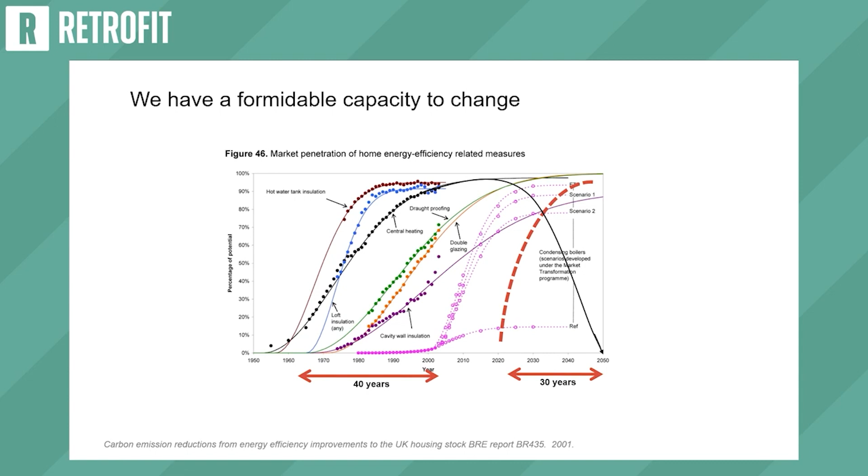So the UK context is 27 million dwellings: 18 million are owner-occupiers, 4.5 million are private renters, and 4.5 million are social rented. 60% of all homes are older than 80 years, so this is really UK specific. 21% of the stock is Victorian, which is the least efficient of the stock as well. And 86% still use gas fossil fuel.

This graph is extracted from the LETI retrofit guide, which illustrates per character, whether it's a flat, a mid-terrace, a semi-detached, detached, or bungalow, the energy efficiency of the dwellings of the UK. On average, at the moment, the performance is roughly 130 kilowatt hours per meter square. We need to reduce this down to 50. This is the great shift that we need to do. If you just want to keep an average figure, this is the sort of shift that we need to do as a country.

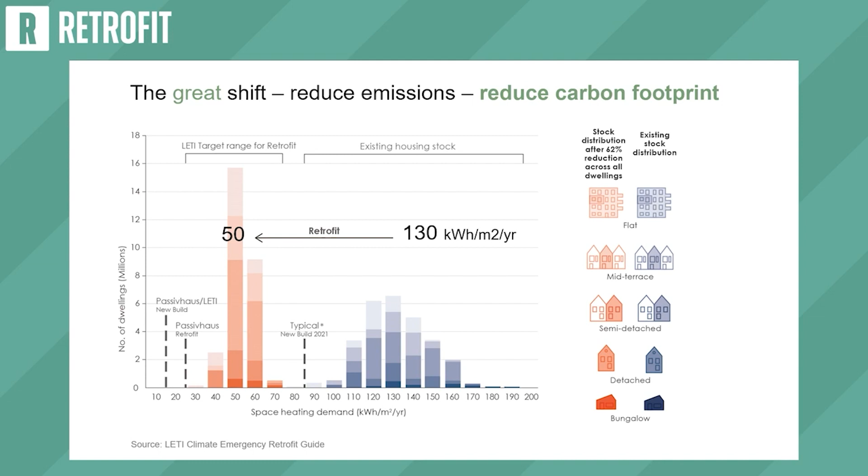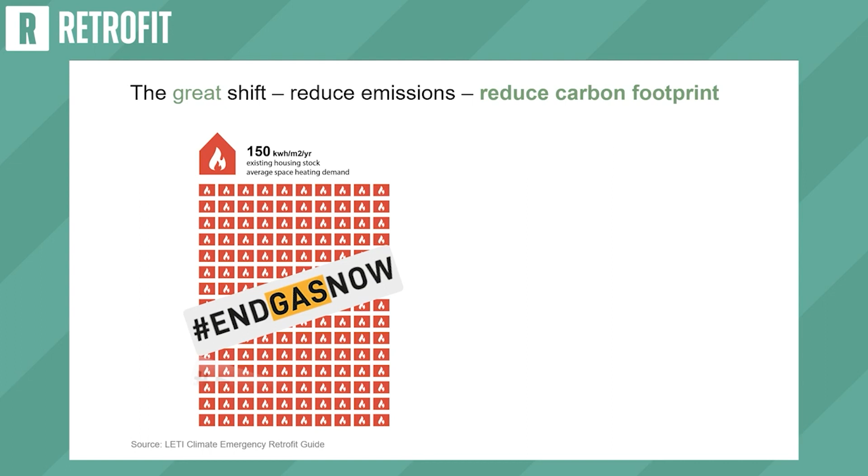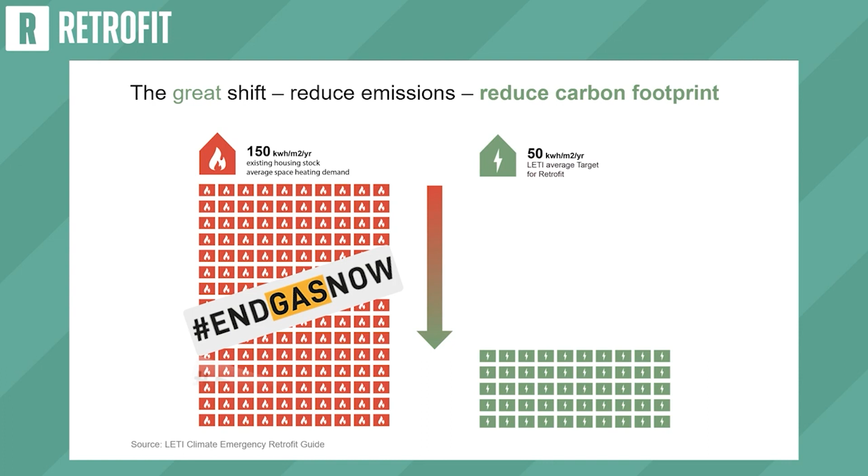At the moment, we have about 150 kilowatt hours per meter square per year, and it's mostly all fossil fuel. So we need to end gas now. This is another campaign launched by LETI, which is trying to motivate people to no longer use fossil fuel. And we need to reduce this down to 50 kilowatt hours per meter square per year using electricity. So that's why we speak about electrification of space heating. So this again is another illustration of the great shift that we need to do.

Obviously, depending on the form factor of your property, you're not going to have the same result if you insulate your property, the apartment being the easiest to reduce the energy demand from, and the bungalow being the hardest. So you just need to bear in mind, once you go into the details of your own retrofit, that you're not going to have as easy a job if you have a bungalow as with an apartment.

There are other metrics which I don't have time to go into, but I would really urge you to have a look at the LETI retrofit guidance for these.

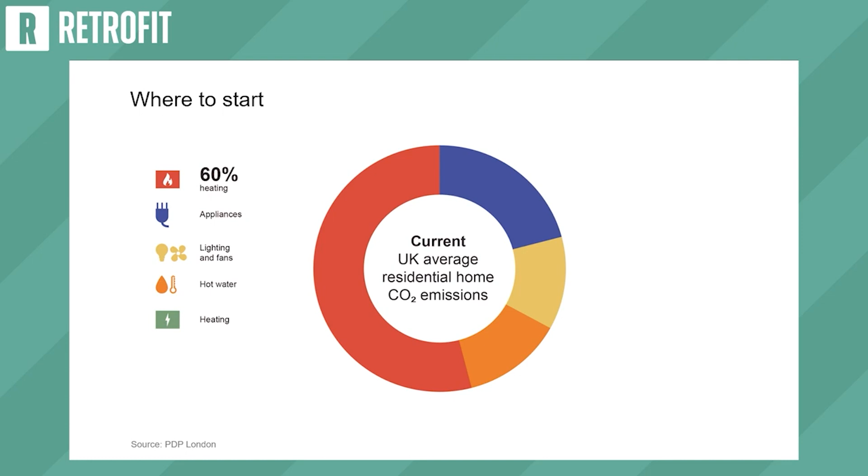The reason why you've heard me talk about electrification of space heating is because, as you can see in red here, most of the energy demand of the UK housing stock relates to the heating of the space. Lighting, hot water, fans and appliances is a lot less in the overall proportion of energy demand of a dwelling. So this is the red portion that we need to tackle, and we need to remove the fossil and reduce it to a minimum as possible.

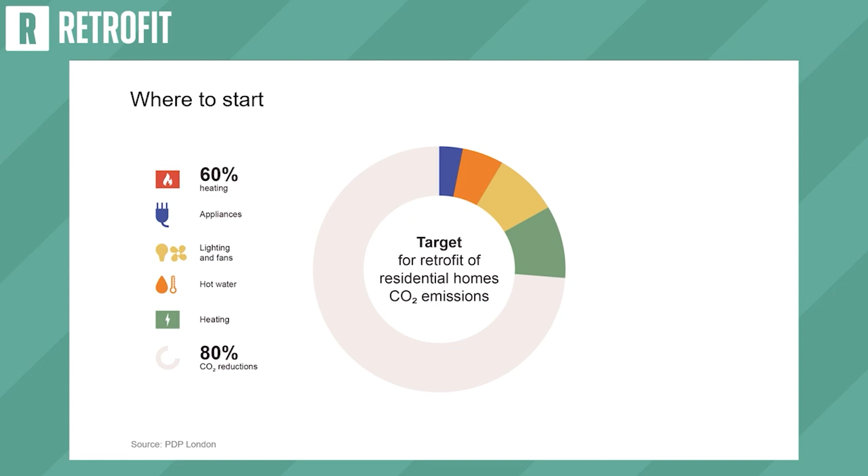So the red now has become green, and this is the shift to electrification of heat in a much reduced demand. This means that while before, in the 19th century, we didn't have any insulated buildings, and we burned fossil fuel as well in our homes. In the 20th century, we turned to gas and kitted out all our homes with boilers, radiators, ventilation systems, etc., but not really in an efficient way. And we didn't really look at the fabric at all, or not very much.

So in the 21st century what we need to tackle is passive measures. So it's the fabric of the building that will enable you to reduce this energy demand to 50 kilowatt hours per meter square per year, and then you can electrify that heat production. So this is a really key finding.

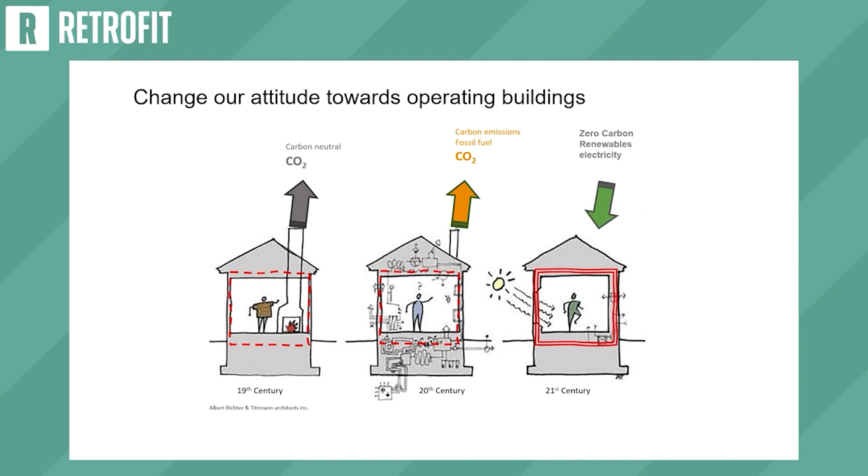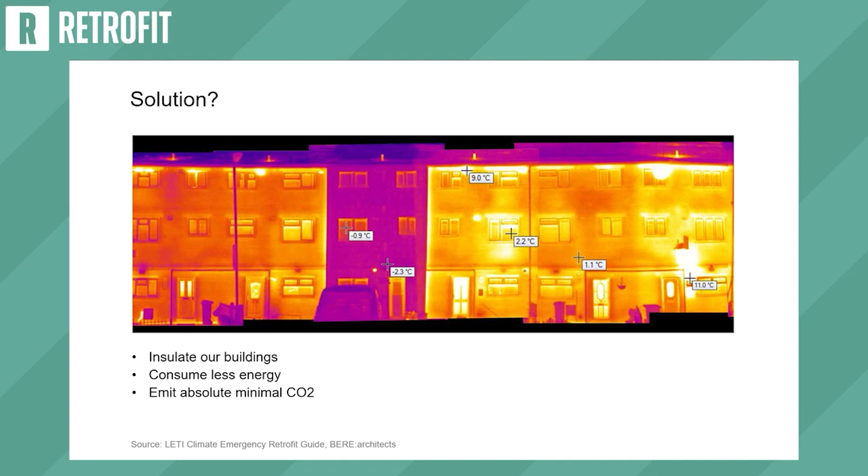How you know it works, you can use a thermal imaging camera, and I love this image from Justin Bere's architects office, where he's insulated a house externally, and this is a thermal image showing how leaky the next door buildings are in comparison to the one that he's retrofitted.

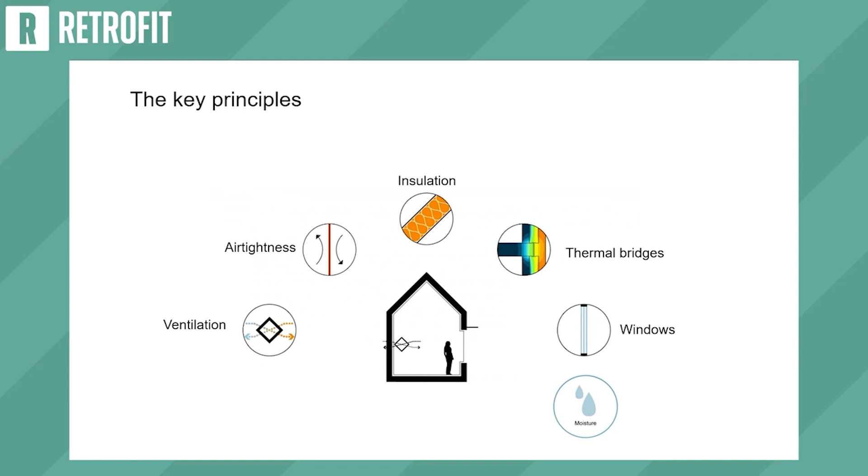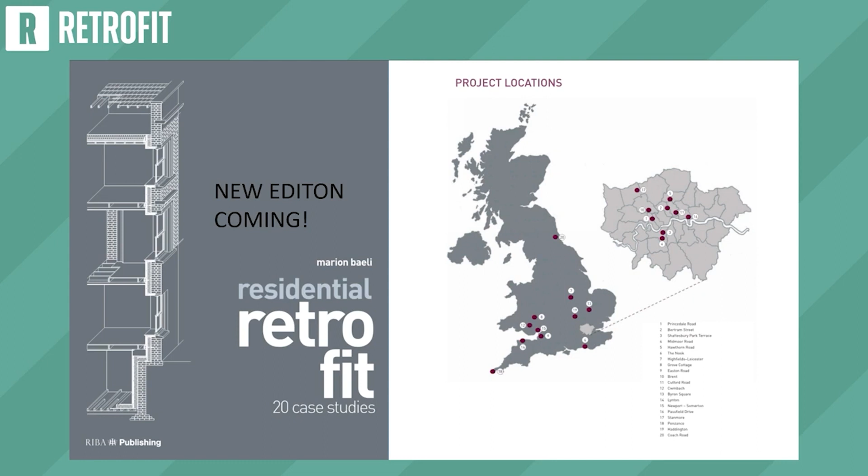I'm the author of this publication, which was published in 2013. So 20 case studies of retrofits, which was based on the Retrofit for the Future program, which was a government program at the time. So I looked in detail at 20 case studies of pre-1919 and post-1919 to try to give people a range of projects and examples to inspire people. This is now going to be re-edited because it's sold out and we're going to add some more new case studies. Hopefully it'll be done this year.

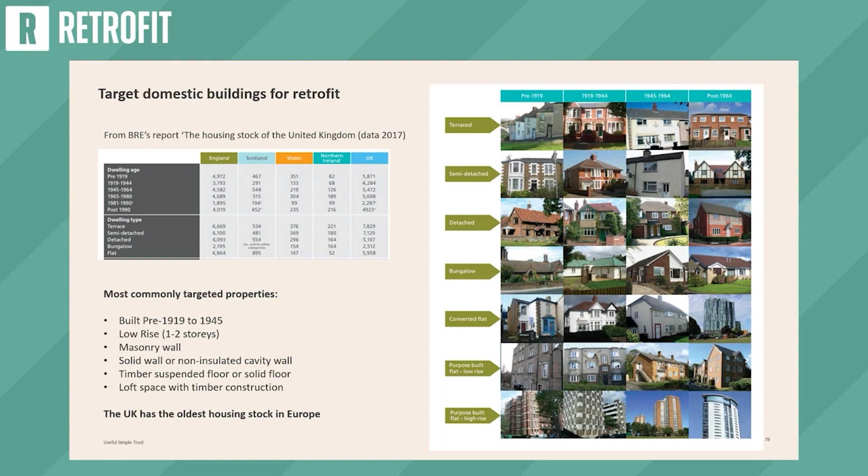So we need to be really careful about how to introduce new elements to existing homes, and this is the principle: we have traditional construction that is usually vapor permeable, usually well ventilated, has gaps, and has got a whole different system in terms of ventilation and structure.

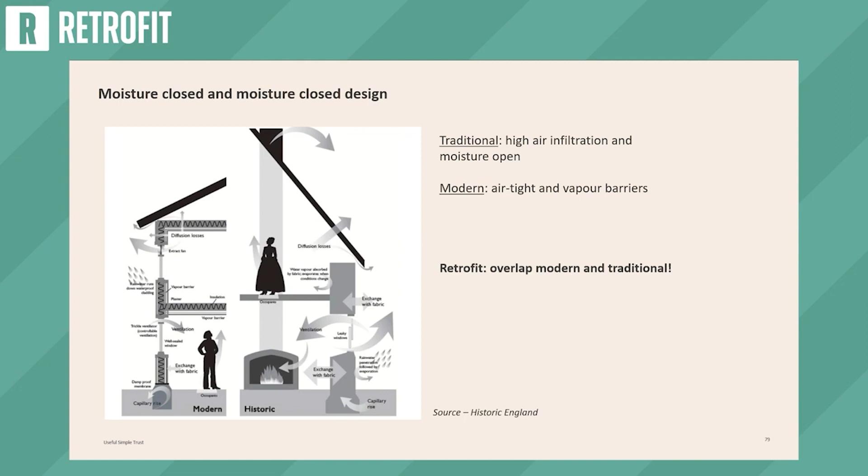And in modern times, we actually build very airtight buildings with controlled ventilation, we control moisture, we put barriers for vapor, etc. But when we do retrofit, what we are doing is overlapping some of these modern principles onto an existing building that was functioning completely differently. So this is what can lead to potential problems in terms of moisture.

Having been in this field for a while, I can recommend two big references if you want to learn more about retrofit and moisture: the Retrofit Academy, of course, and we got taught in their course about it in quite a lot of detail. The other organization to be aware of is the UK Centre for Moisture in Buildings. It's a research center based at UCL, and is specifically developing guidance and working on moisture in buildings.

So why is this essential? Why is this so important? It's rising more and more in public awareness. There's been the case of a child who died a couple of years ago, and his death has been directly related to mold issues in his house. Although probably not the first and not the last, it raised a lot of awareness in this field. So there's been quite a lot of government-funded research about the situation, especially in social housing, on damp and mold. So a big driver for this is health and well-being, especially for vulnerable residents in social housing.

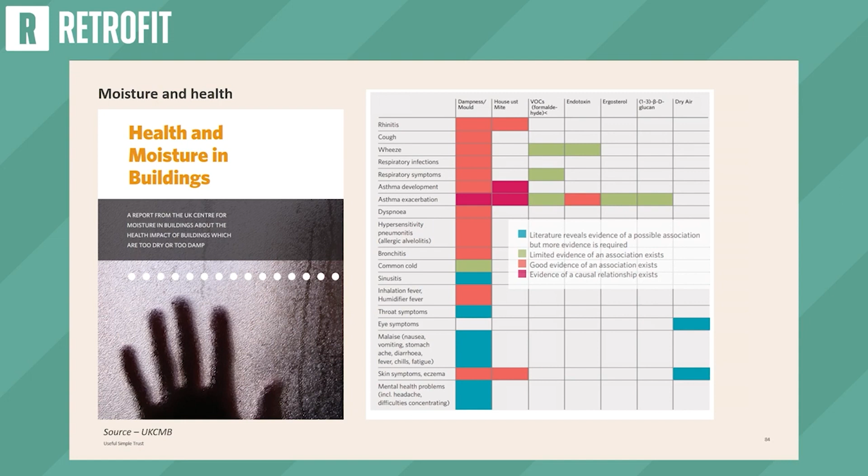This report from the UK Centre for Moisture in Buildings shows that damp and mold are correlated with evidence to a number of illnesses and respiratory symptoms, increasing virus issues, and all sorts of worsening of asthma and other pathologies. So this is also why this is so important.

And of course, sometimes landlords and householders put the blame on each other, but what we really need is for the landlords to do their part, but also to enable homeowners to use strategies at home related to moisture, especially in bathrooms, in kitchens, in the way they dry clothes and use the building. So both are part of solving the problem.

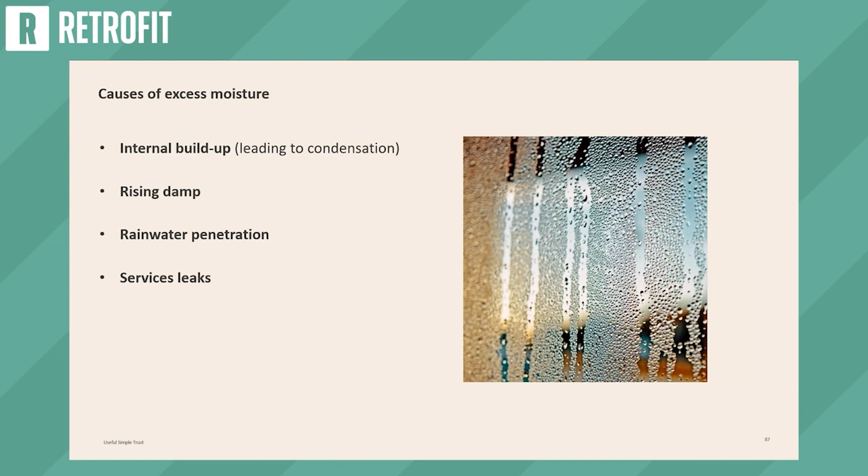So how do we diagnose these problems when we go, for example, on a survey just before retrofit? The causes are pretty much always in these four categories. There is internal buildup of moisture from people's breathing, metabolism, pets, cooking, showering; all that builds moisture internally, and this might lead to condensation if there's not enough ventilation. Rising damp is damp that comes from the ground by capillary action through the walls. Rainwater penetration, when you have a roof leak and stuff like that. And services can sometimes leak as well.

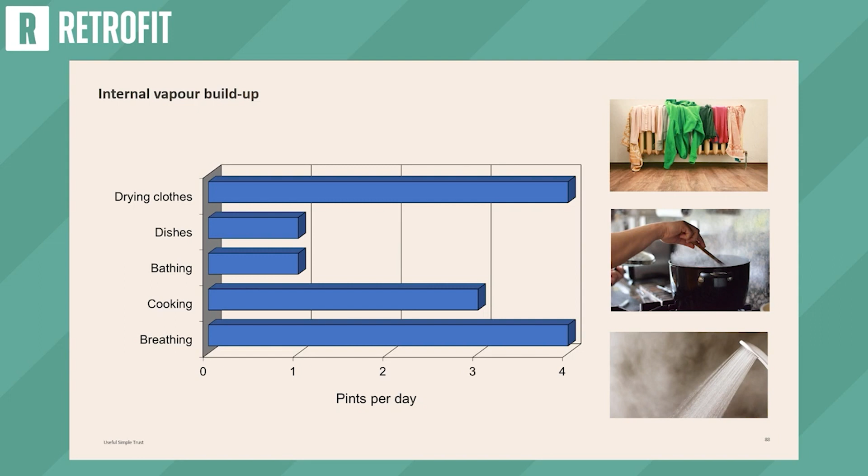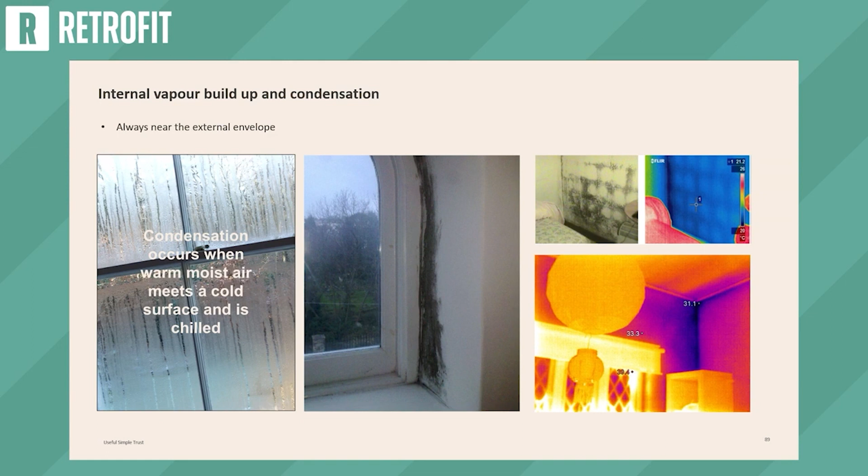So this is just an idea of what contributes to internal production of moisture. You might be surprised that some of these things are very impactful. For example, breathing: if you have 10 people living in a house, or one in the same house, it's going to make a lot of difference, isn't it? So what happens when there is a lot of moisture that can't escape? It will go to the coldest surface in the building, reach dew point, condense and become water. Usually this happens where there are thermal bridges, so around windows, around junctions, and wherever the temperature is lower.

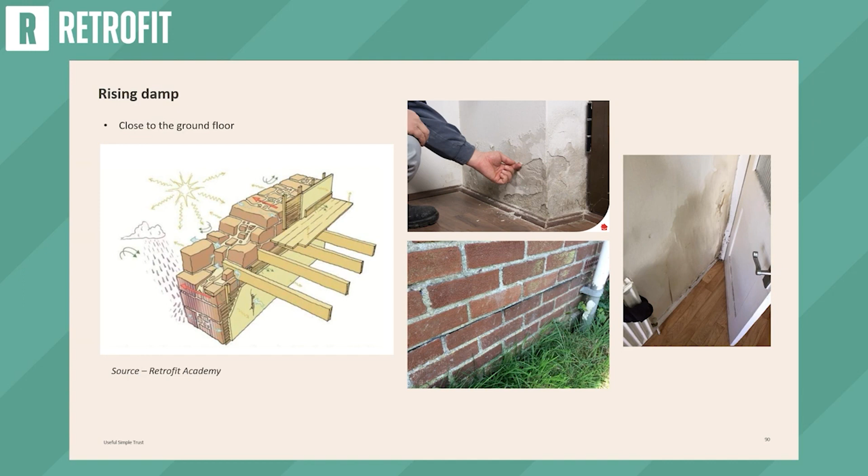Rising damp is identifiable because it comes from the ground up, and sometimes there is a damp-proof course in properties, about 20 centimeters from the ground, that stops this capillary action from going further. This is an example of a damp-proof course in that picture with the masonry wall.

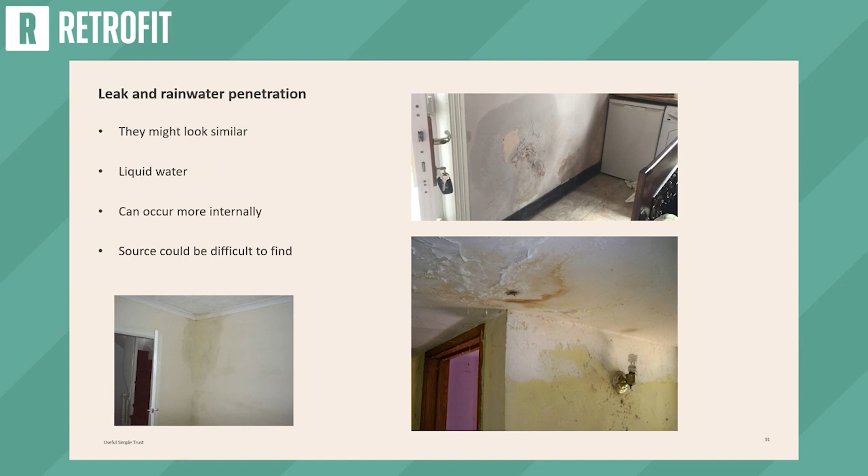For leaks and rainwater penetration, how do you recognize them? This is going to be a lot more water-based. It may not be in the external wall, but maybe internally. It's going to form a patch, and it's going to be liquid water, not just vapor. You might see some swelling of the rendering, and you might see really wet patches.

So when we add retrofit measures, we need to be extra aware that a damp structure is actually going to be less energy efficient, because if you have a wet coat, you're going to be colder than if you have a dry coat.

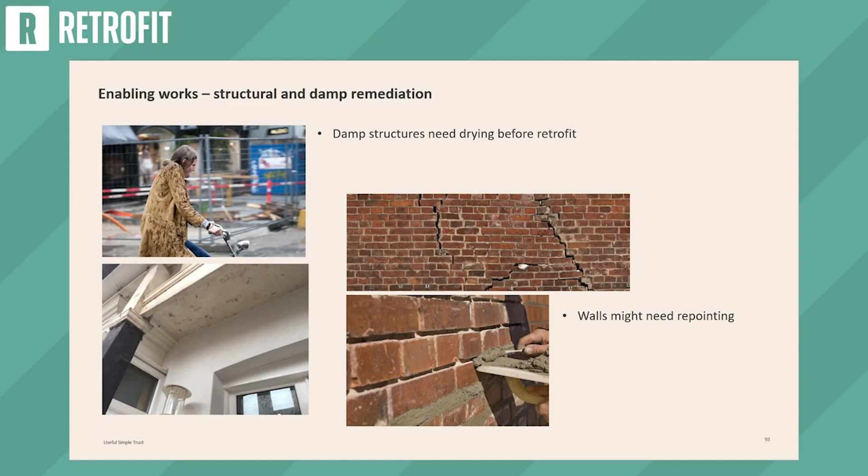Anything to do with retrofit needs to be first checked for damp and structural remediation. You might need to remediate that first, let the structure dry, and then you'll be able to install your retrofit measures.

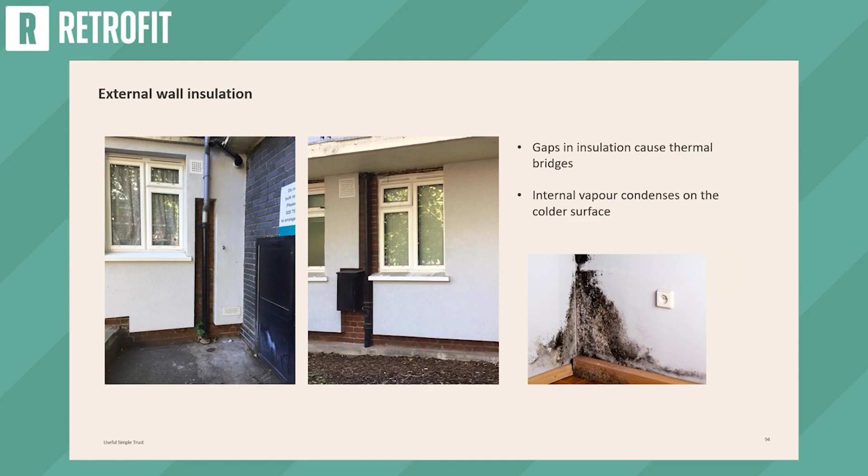Another thing that can happen is if there is not a damp-proof course, or if there are gaps in it, then capillary action produces more dampness to come up.

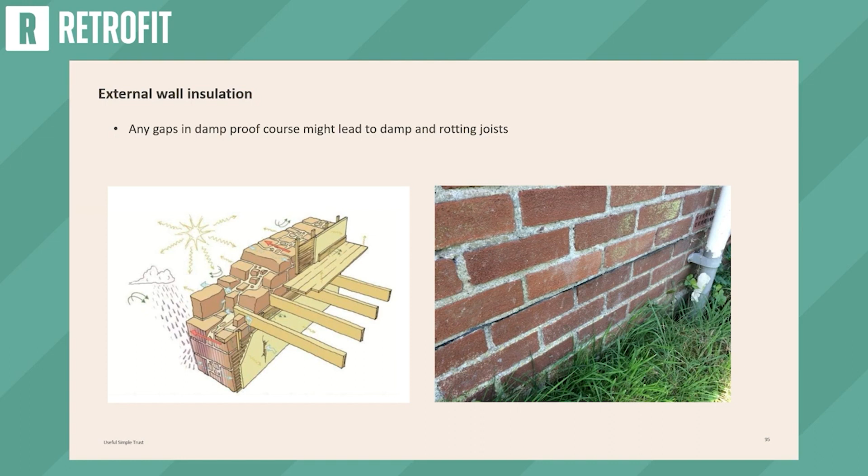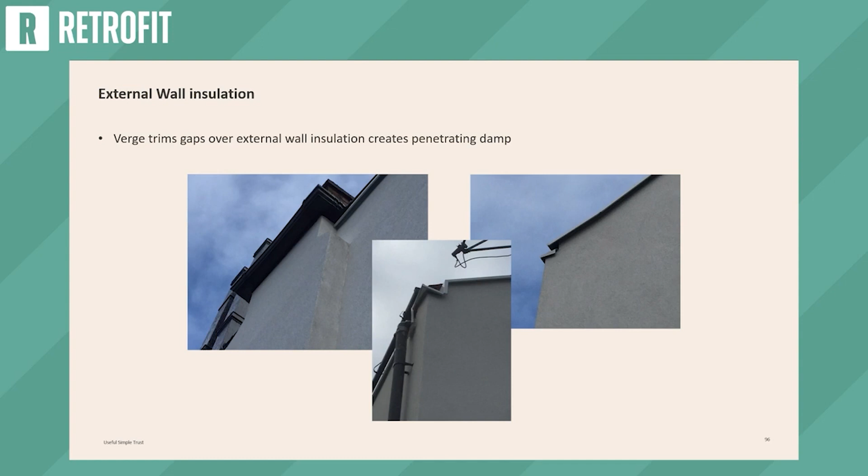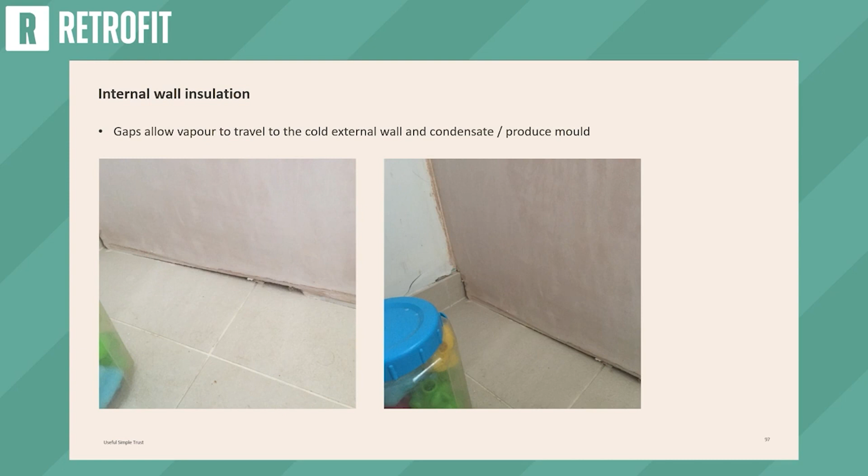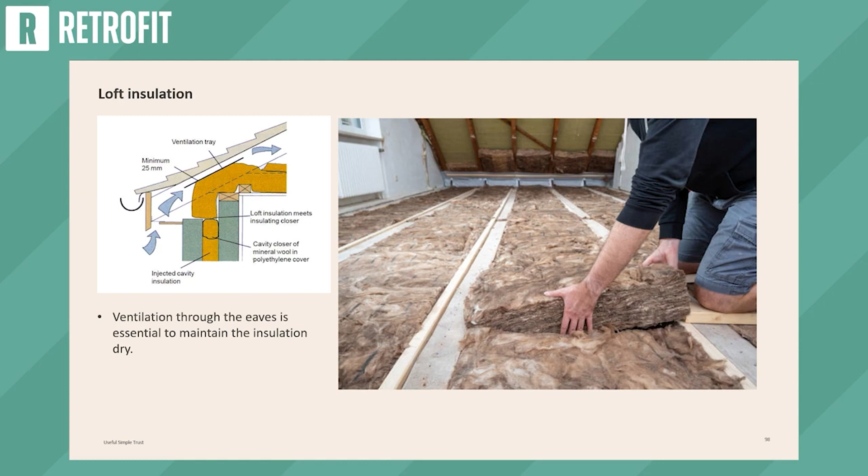When putting loft insulation, we need to make sure the loft is well ventilated, because otherwise you might have a build-up of moisture within the loft, and then insulation can get wet, and all the benefits are going to be lost.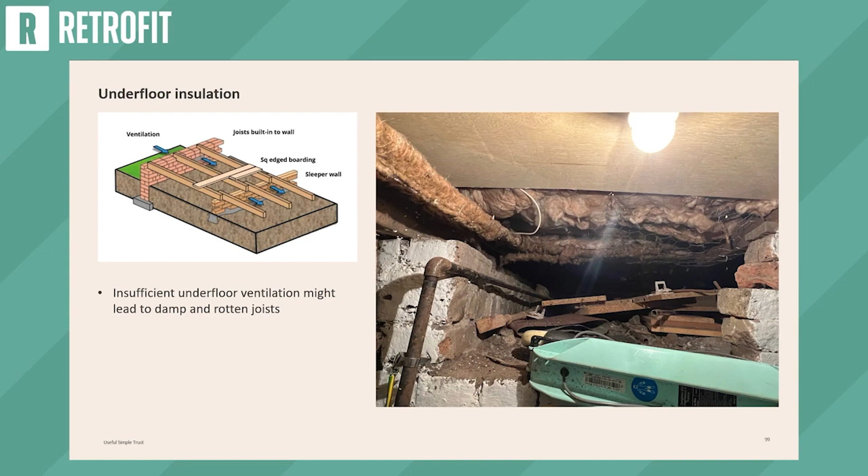So in conclusion, basically there are many strategies on how to deal with single retrofit measures, but something to keep in mind are these principles: first, you need to do any remediation of damp before you actually start your retrofit work, and take an integrated design approach.

You might have seen the STBA wheel before, the retrofit wheel, where you put—I think I put cavity wall insulation in here—and it tells you how many other systems in the house just one measure will affect.

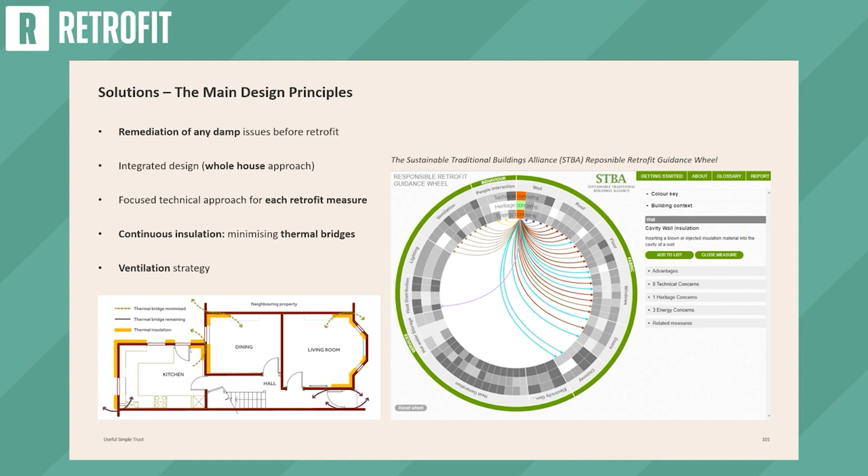Focusing on each retrofit measure, as I went through some examples, understand where there could be potential weak points, continuing insulation to make all these junctions able to stop forming those cold bridges, and of course adding ventilation if you're making the house more airtight through more insulation or more airtightness.

So I've put two pages of references for you in case you want to have a look at the PDF—there is a lot more reading in here that you can do. So I hope I kept good timing, and thank you very much for your attention.

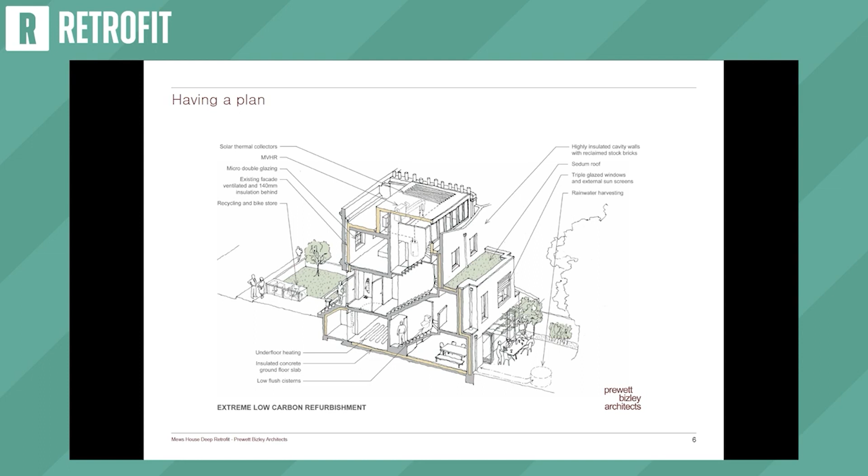The project I'm going to talk more about today is this one - a more recent project, a Victorian Mews house. There are a few key points going clockwise around that section: the wall insulation bottom left, which is a plastered-on wall insulation - I'll say more about that later. Then a very high performance window which replicates a Georgian sash very closely but performs more like a triple glazed window, even though the glass is only 6mm thick. Solar shading too in the upper windows.

In London and the rest of the UK, we're increasingly going to experience overheating problems in the future, so managing solar gains is really terribly important. This house is one of the first few projects we fitted air source heat pumps to, so low carbon heat, as Marion was explaining. Finding a place for that bit of kit is often a challenge. There's also a ventilation unit with heat recovery, top right, and going down the side there's underfloor heating and a drying cupboard - a place to dry clothes and manage moisture effectively.

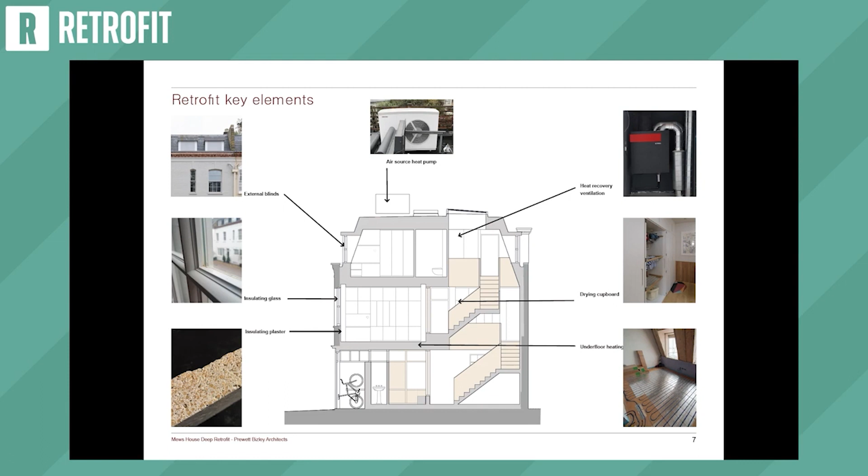Before we did anything, we measured the energy consumption and broke that down into heating, hot water and so on - that's the graph on the left. We also looked at EPCs, compared those, and did our own passive house model, calibrating that with the bill data we had.

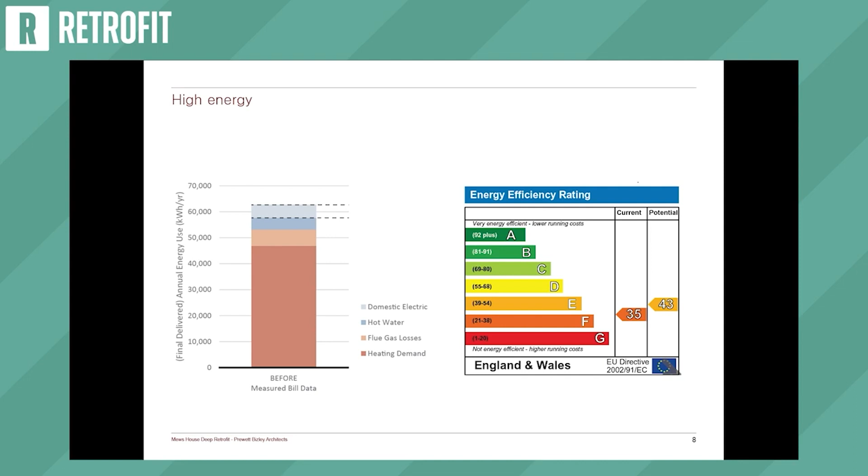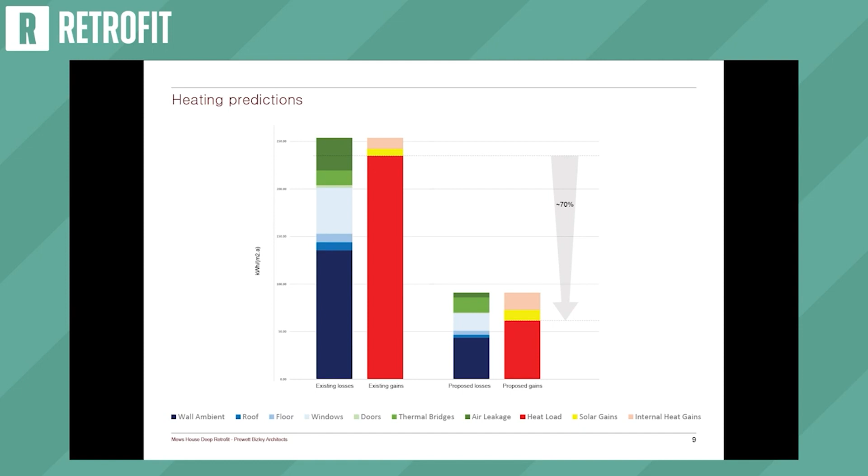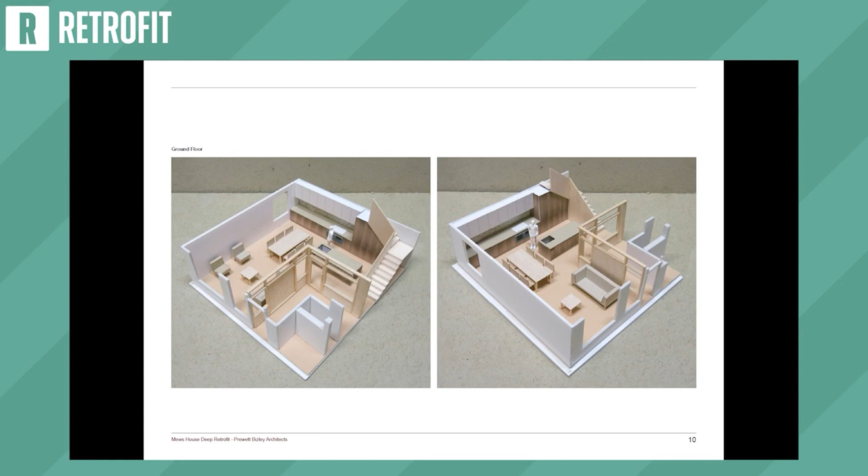By deploying the measures I've described - the insulation, the good windows, the air tightness, the ventilation, the heat recovery - we were able to make a massive inroad into space heat demand and reduce that heating demand, as on this graph. There was also quite a lot of architectural work which went with this retrofit - quite often retrofits go alongside an extension or a conversion or something, and that was true in this case, but I'm not going to talk so much about that today.

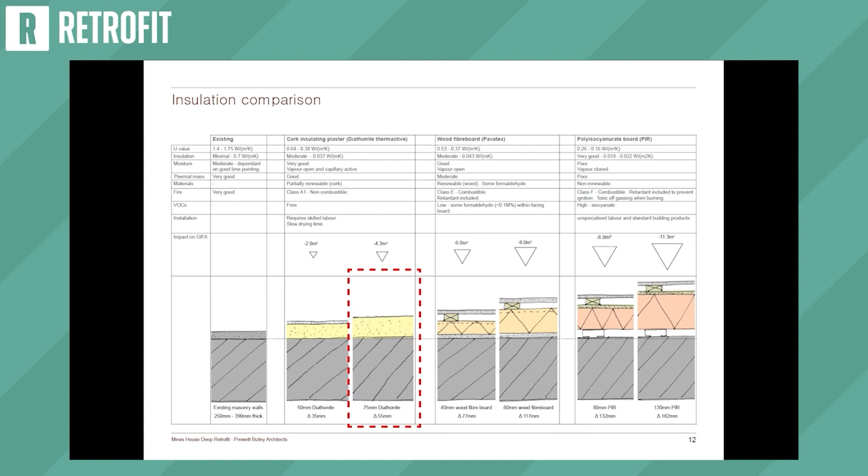This is a comparison we did at the start of this project - it's a solid wall Victorian house. We looked at different types of insulation and the U value we could obtain with different thicknesses of different sorts of insulation. The one highlighted with the red box is the one we went with, so it had very little impact on square meterage of floor area, relatively thin. It's a moisture-open material, completely breathable, helping manage moisture in the building quite effectively, in the way that Edith described. It didn't get us an amazing U value, but it was good enough in association with the other measures, the wider whole house plan, to reach the goals I described.

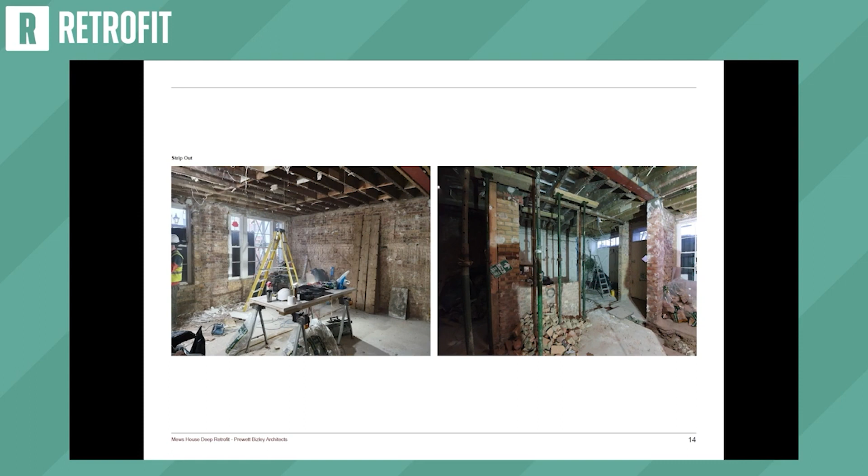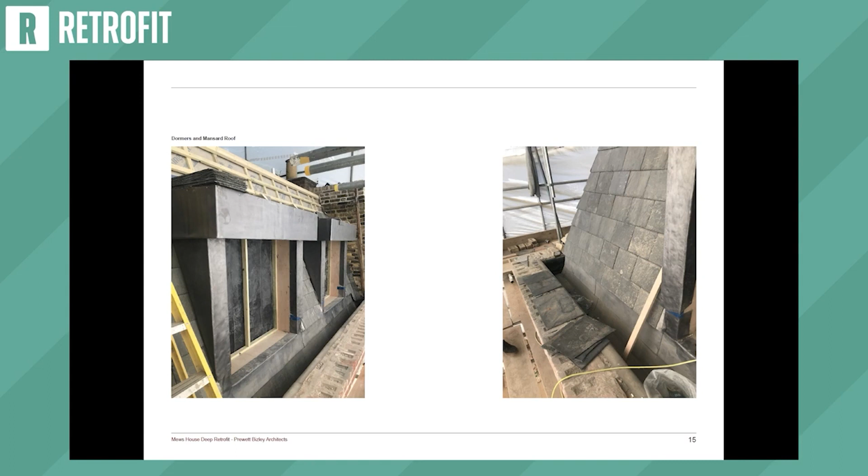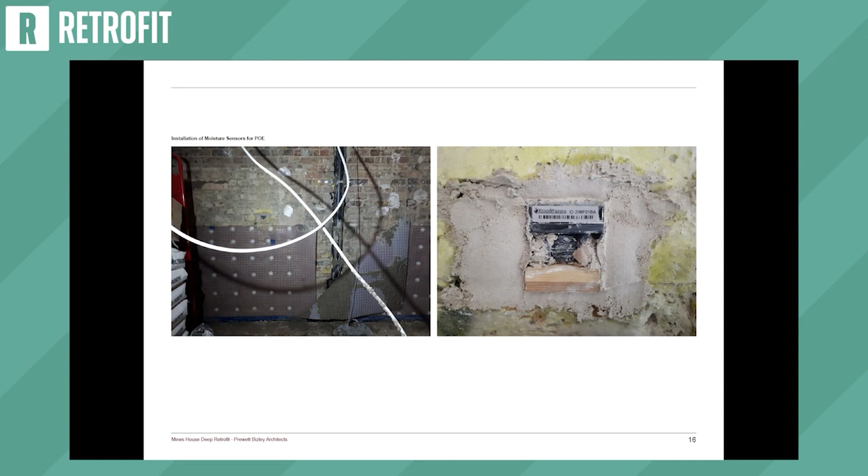So onto site, strip out time, finding out what's behind those walls - not much behind the plasterboard, often bare brickwork in this one. On the roof, the new roof construction, highly insulated, super airtight. These dormers with quite fat cheeks for extra insulation, and quite thick heads too for the blind box I described. A little bit of tanking on one wall, and some moisture monitoring probes going in early on so we could see later how the wall was doing.

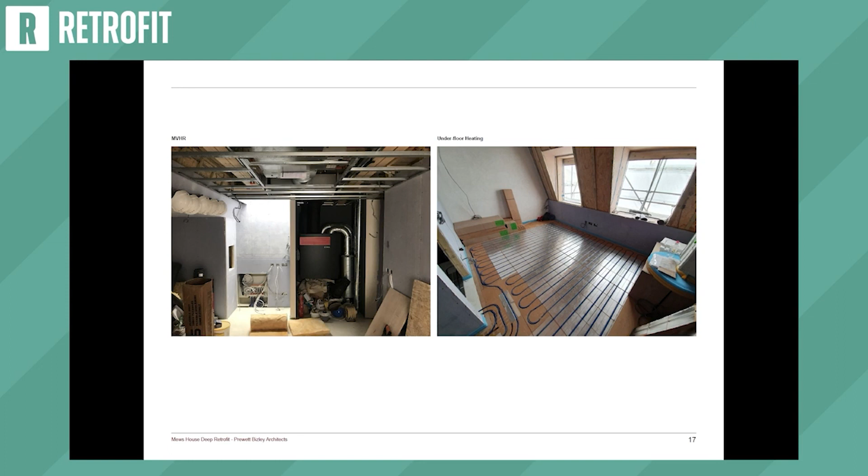Ventilation with heat recovery going in, underfloor heating going in. All of these things, which look quite simple, require quite a lot of time on site to make sure that the coordination we've done on the drawing materialises in reality.

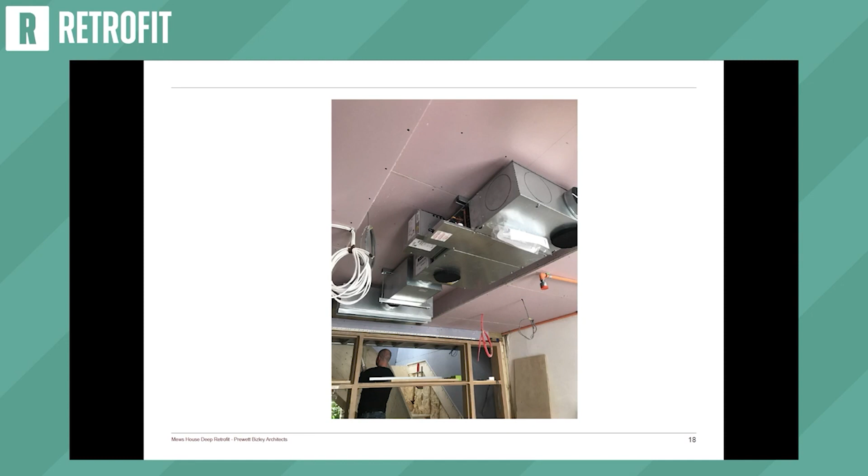We also included some ventilation with cooling. This site's in central London, and with the urban heat island effect, as we discovered last summer, we can get very high temperatures which last for several days. So this was used last summer - I'll describe this a bit later.

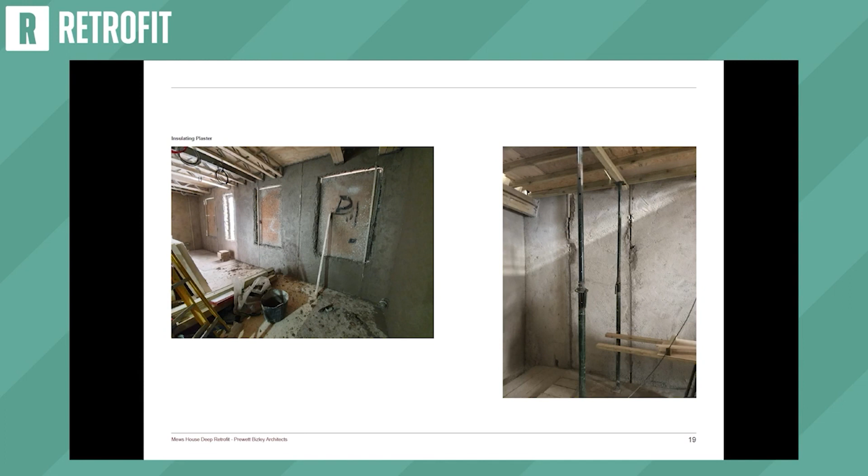This is the wall insulation going on - a much messier process than the CAD drawing, and a contractor who was actually learning to apply this material on this project. The day before, a lot of the insulation went on the wall and fell straight off until he got the mix right, and today was a good day.

There's the insulation drying out, with things being fixed through it, in this case a stair.

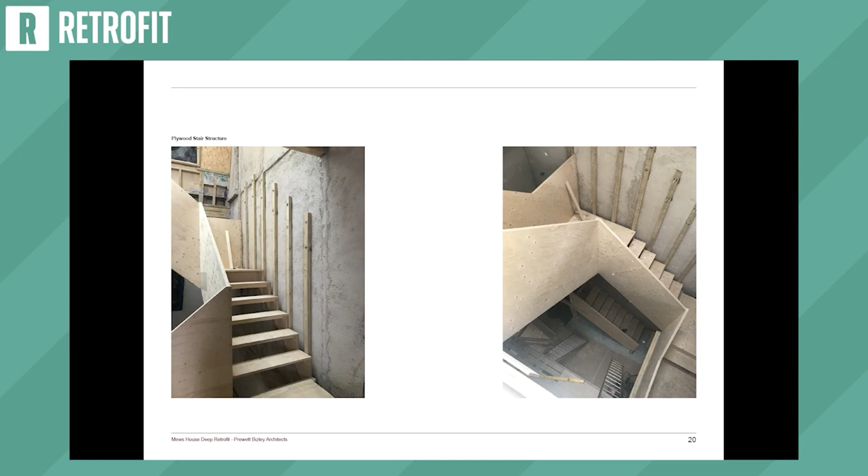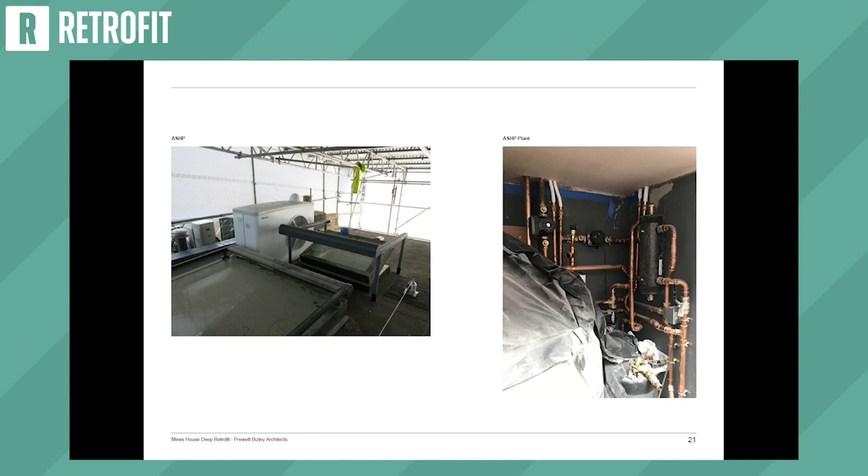Up on the roof, the air source heat pump going in, and other clever bits of kit like roof lights and blinds. Down below on the right hand side, that's the cupboard you need for the hot water tank and the associated pipework and controls for an air source heat pump run heating system.

Commissioning: some things are easy to commission, some things are harder. We found the cooling was quite difficult - measuring the airflow we were getting out of the slot diffusers, which we designed to be almost invisible in the ceiling. You might recognise one person in that photo - that's a rig I ended up having to make bespoke in order to measure the airflow, but it was worth doing. When you design things, you've got to think about this stage.

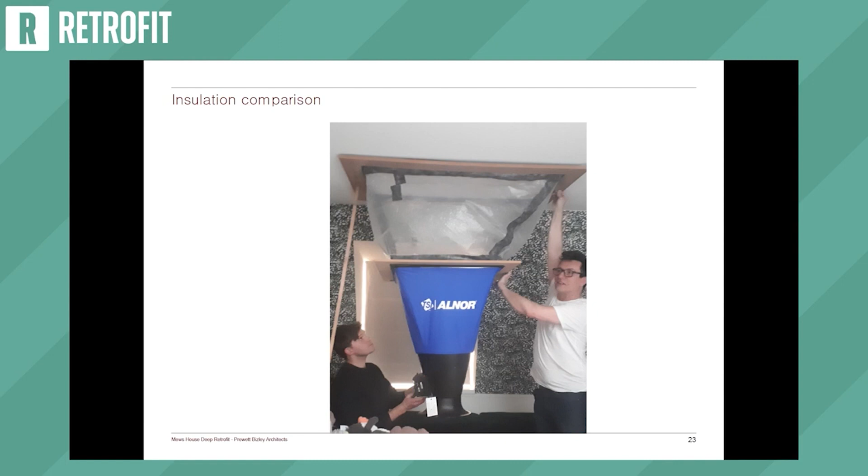In terms of measured energy use in the end - we've got the before on the left, the after in the middle, that's the energy going into the house, which is pretty much as we expected, slightly better. But when we plug in the air source heat pump, that gives us consumption at the meter on the far right hand side. You can see the heating and hot water demand has been reduced by about 90%, and that's still with wall insulation that isn't spectacularly aggressive.

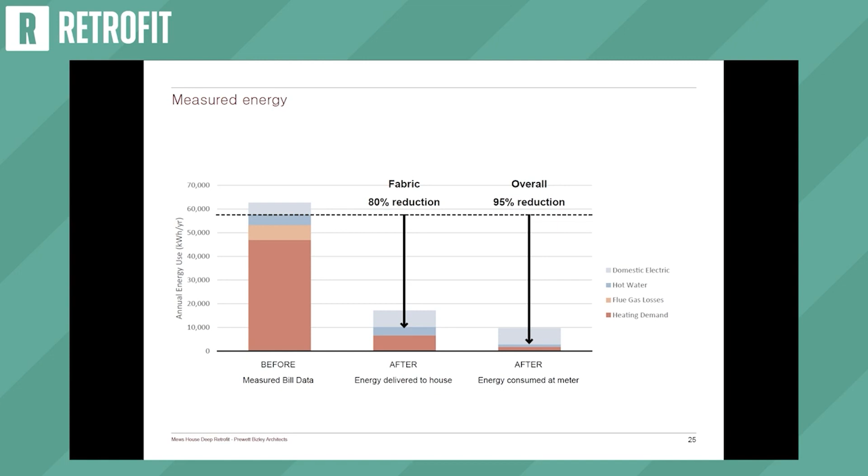All those are measured things after the project to confirm the house is doing as we planned. This one's a bit harder to read - it looks at temperature throughout the year. The yellow line is what's happening outside, so usually it's quite low, and in the summer it gets higher than the indoor temperature. The indoor temperatures are tightly grouped in the grey zone, almost a flat line - a very comfortable internal environment.

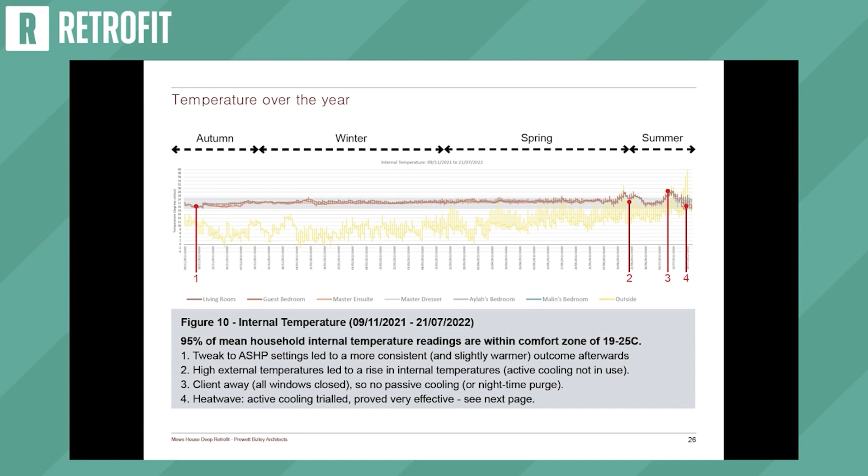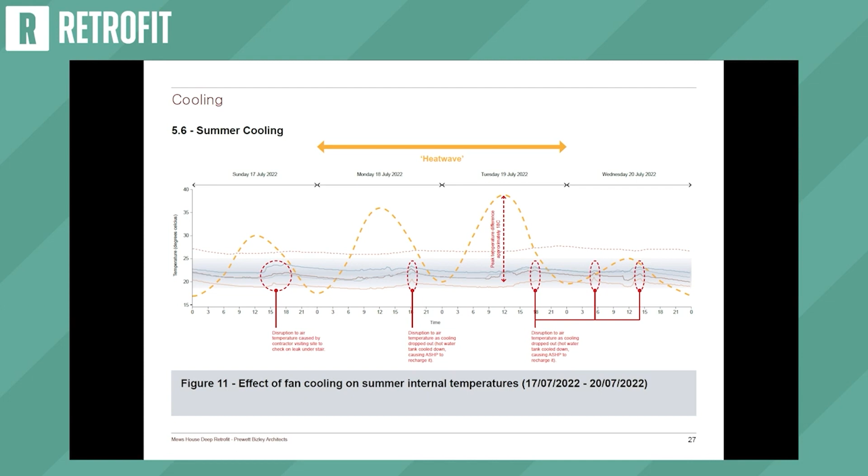This is a plot of the short period last summer when there was the heat wave. Again, the yellow line is moving a lot, getting very high and dipping down to about 20 at night. The internal temperatures are staying well below 25, between 20 and 25, not varying very much at all, and that's really a result of being able to deploy the cooling system I've described.

A little bit about relative humidity too. The blue line is quite high and varies a lot outside. All the coloured lines below are generally very flat, between 40 and 60% - so very comfortable. In bathrooms you see occasional spikes, they go quite high but drop back immediately, mainly driven by the ventilation unit constantly extracting the warm, moist air from those spaces.

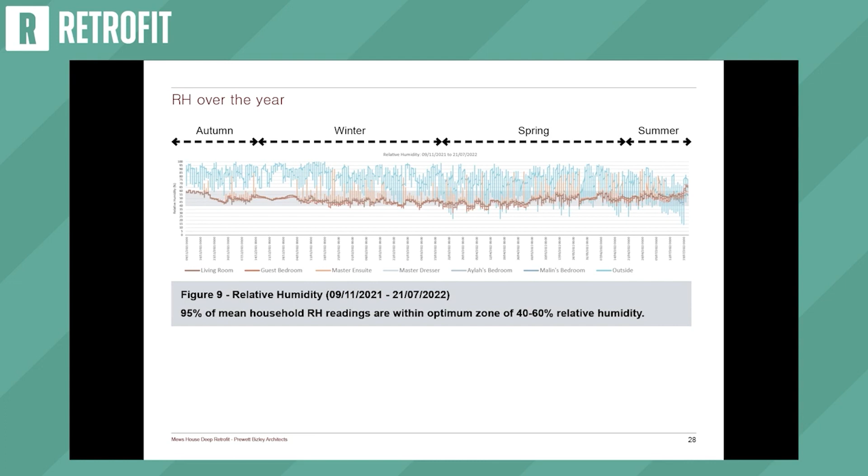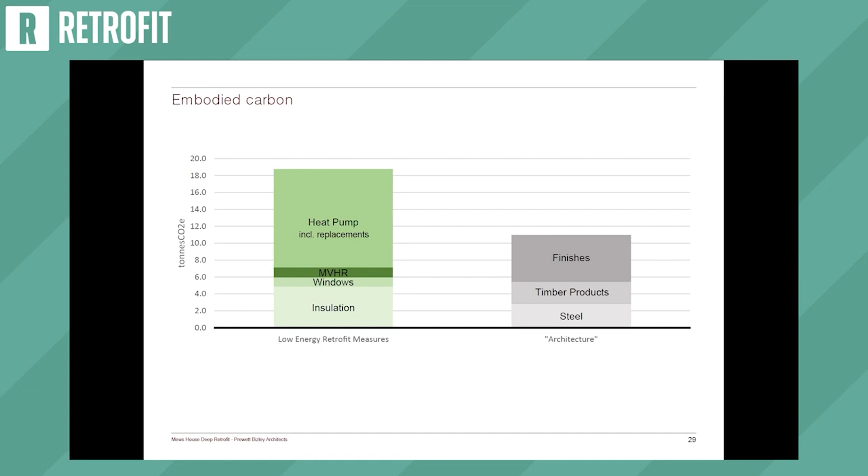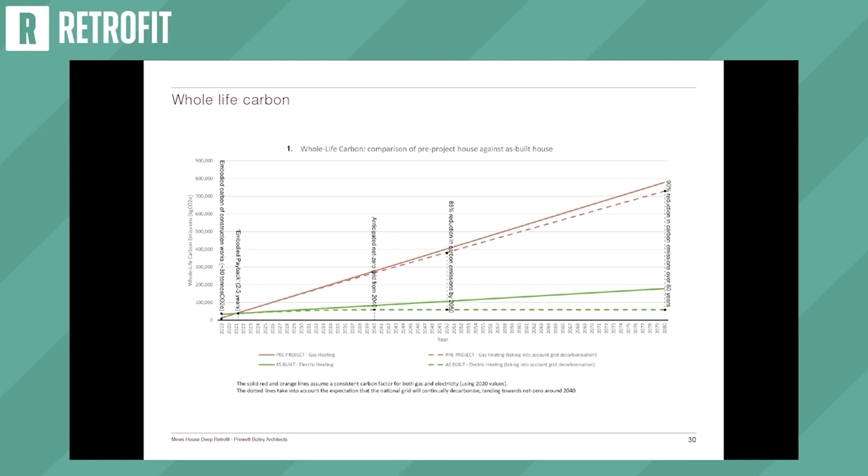That's a little comparison of embodied carbon, and I was quite pleased we spent most of the embodied carbon on the energy saving stuff here and not so much on the grey architecture stuff. I say that as an architect, but if we're going to do retrofit well, we've got to think how we spend that carbon. That's a plot showing before and after, projected over 60 years - the reddish lines are what would happen if we'd not intervened, and the green line is what the retrofit should deliver, a massive reduction in overall carbon, looking at operational and embodied together.

In conclusion, a few key lessons learned, or things we could have done better, because I think it's important to focus on those too. The air source heat pump got about 350% coefficient of performance, which for those who know is quite good, but we could have got closer to 400 if I'd known what I know now about the underfloor heating system - there are a couple of weak links we left in that, which I sort of regret.

We've not fitted any renewables or PV, and I think we should have been braver at planning. We were a bit scared we'd get hung up on a lot of conservation issues, but I think the climate has shifted now and we could probably win that.

And the commissioning of that cooling system was actually, as you probably gathered from the photo, not completely straightforward. So, thinking about systems and how they work in reality, very, very important.

And this house was featured on House of the Year last year, so you can see more on Channel 4 if you fancy.

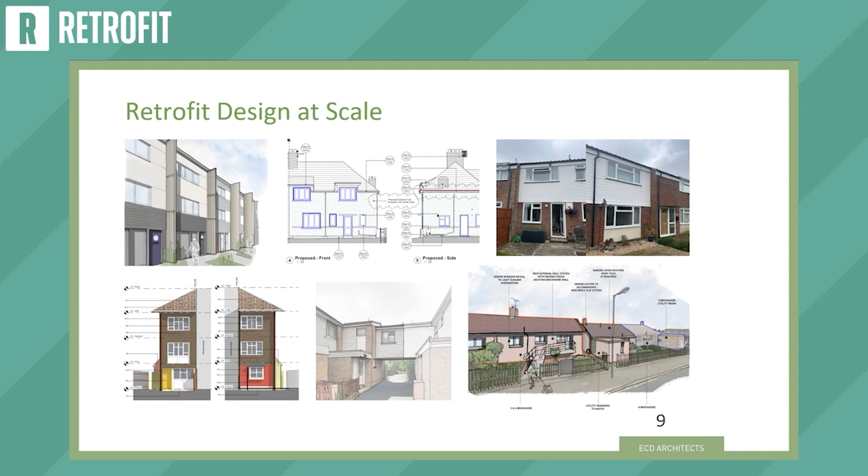So, retrofit at scale, what does that look like? These are just some images from the last couple of years of projects that we've been involved in, a variety of different types, and the kind of drawings that we are producing. But first, just to talk about funding. And the SHDF, or Social Housing Decarbonisation Fund, which many of you in the audience will be aware of. We're in the second wave, which should be announced hopefully in the next few days, maybe next week, I've heard, but we'll see.

But we've been involved in the very first phase, what's called Demonstrator, and then Wave 1, and have been involved in about 10,000 properties so far nationally. Some of them in Scotland, which is a different programme, but overall around about that sort of number. When you come to apply for that funding to BEIS, or whatever the department is now called, it's important that you identify the right properties.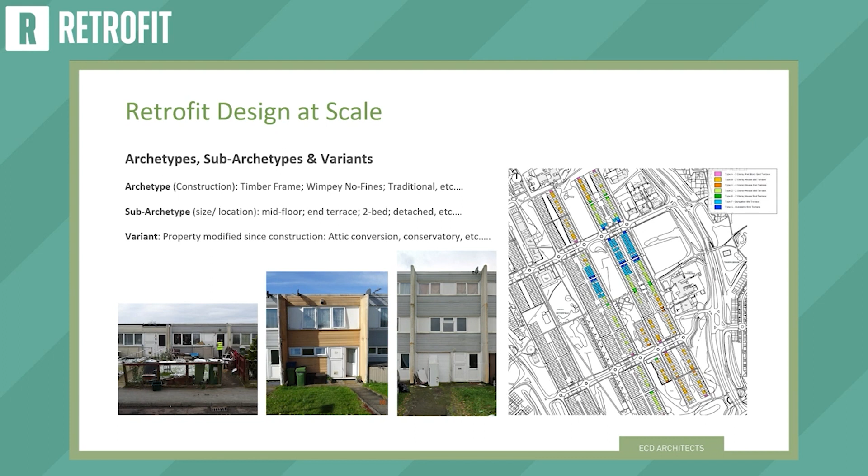And then finally the variant. Has that property been modified since it was originally built? This is particularly important in the private sector, but also in the public sector. Has there been an attic conversion? Has there been a conservatory? Has there been a porch? Multiple things that could have been done differently to that property, which will affect the performance. So understanding those is absolutely crucial, and identifying them at an early stage and building that into your funding is really important.

I won't dwell very long on these next few slides because these are just the outputs from the type of projects that we've been doing. I think these presentations are going to be shared, but feel free to take pictures.

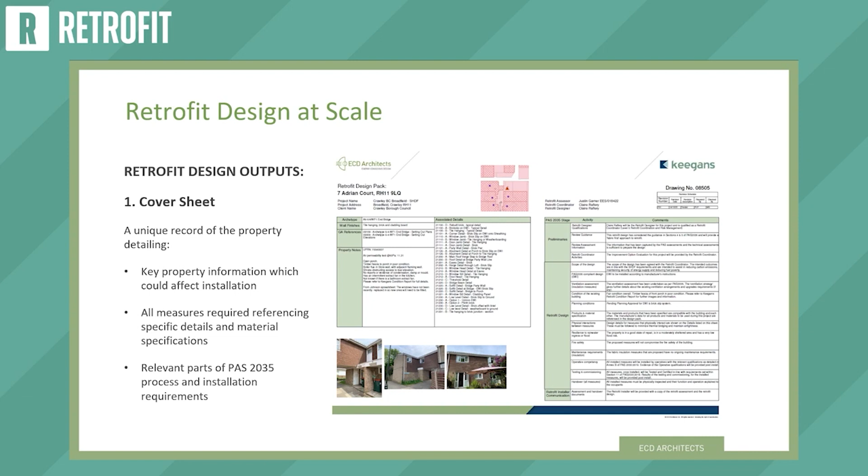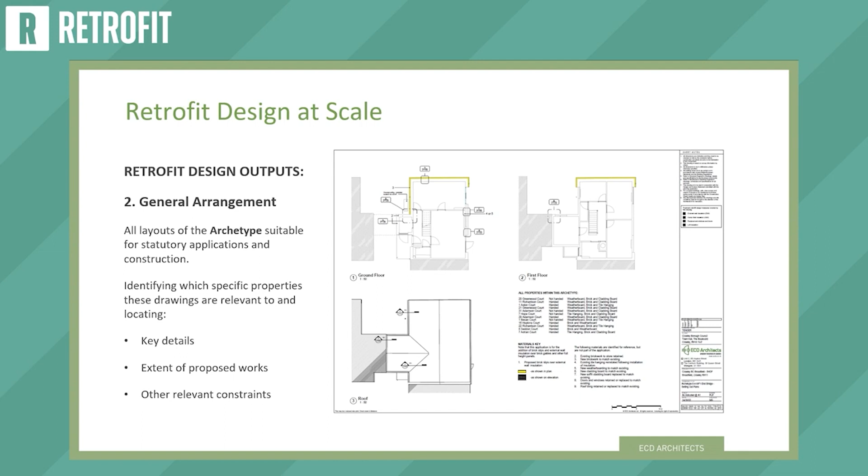This is a general arrangement for a particular archetype, so this archetype and also a sub-archetype because it's a sort of corner block, but it will apply to other properties, and in fact you can see on the page there we've got I think about a dozen properties that are similar to that property, so that this elevation applies to these properties as well. I think this one was in Crawley, but you can see the measures and referencing the various details that need to come off it.

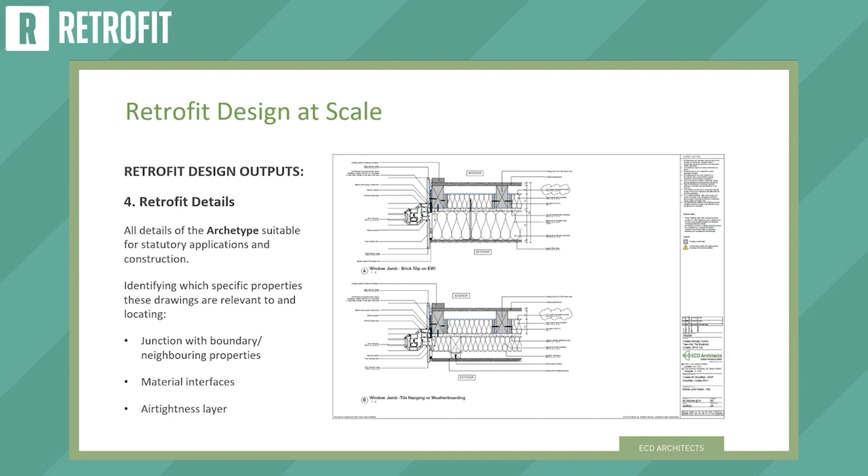Same with elevations, and then obviously the details, like any architectural detail, keyed off the plans and identified in the specification, which is there. So that's the sort of pack that you would have for a property. You'd have a cover sheet, the relevant elevation sections, plans, and the relevant details. Some properties might have 5 or 6 details, usually not less than 5 or 6. Some might have 20, depending on the complexity.

At scale, I think it's very important to say, I know the session isn't fundamentally about engagement, but it's really, really important to talk about that because every property and every project is unique and every group of residents are unique, and understanding the starting point is absolutely crucial. How does the landlord want to interact with the residents? This project will make a massive difference to the residents who live there, both eventually in terms of the benefit of the reduced energy bills and savings and improved thermal comfort.

But during the works, there's no getting away from it. It will have a huge impact on them. Even if the works are done externally, it's really important that we engage with residents and ensure that they buy into the process and really understand what's being proposed and can have a say in that as well. And then, as Bob talked about earlier, really important that we talk about the post-completion, having a simple user guide for the resident, how to use their energy efficient home, and having that feedback loop and commissioning.

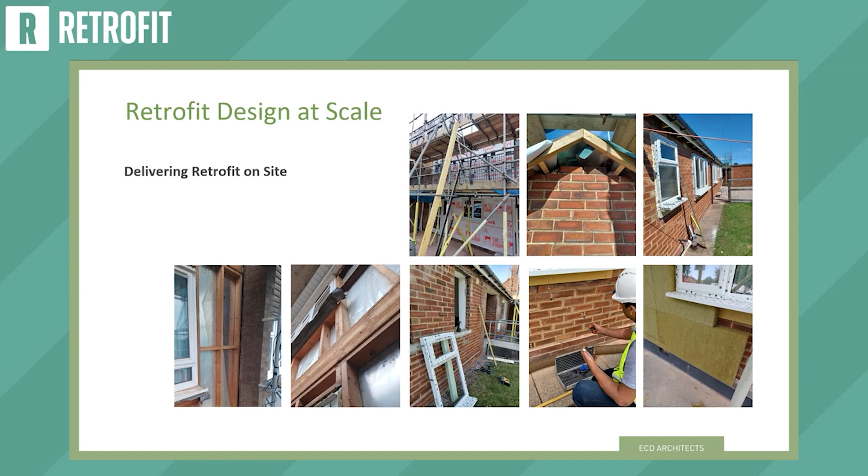So I'm not sure if it's in those pictures, but one of our projects was insulated cavities. The holes had been drilled and the holes had been filled, but the cavities had never been filled. So there was something fraudulent going on 10, 15 years ago when work was done. And we only found out because when we took the windows out, there was no insulation there. So I suppose a bit like Grenfell, we will find some cans of worms in the process. And that's it from me, I think.